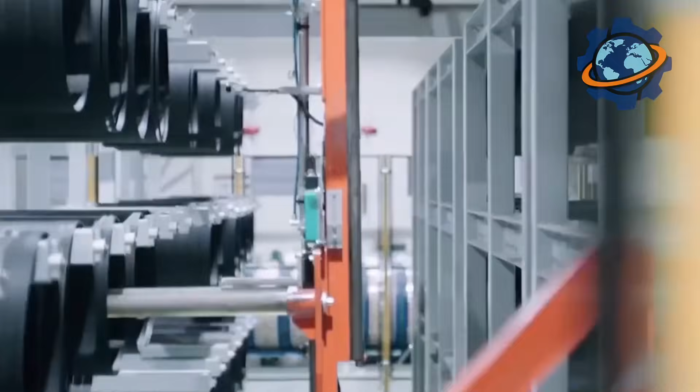Michelin plants in the United States appeared in 1975, when the company opened its first facility in Greenville, South Carolina. Since then, Michelin has become one of the leaders in the tire industry in America, establishing 19 modern production sites in 16 cities. Today, they produce tires for cars, trucks, agricultural machinery, and even aircraft, combining French engineering with American scale. Let's go take a look.

This started long before American drivers knew how to pronounce Michelin without an accent. Long before the internet, before electric cars, before all these smart tires with chips, when cars still hummed and smoked with real gasoline, and a road trip felt like a journey, not a commute to the office. The French brand Michelin, with its smiling rubber man, known here as Bib the Michelin Man, had been dreaming of America since the early 20th century. But this dream took a long time to ripen.

Everything changed in 1973 when the oil shock shook the United States. Drivers started looking for savings, automakers for efficiency, and in this new game, a high-quality radial tire from Europe suddenly became not just a novelty, but a real breakthrough. Michelin, which had invented radial technology back in 1946, understood. The moment had arrived.

Greenville, South Carolina. It was here, among the hills, pine forests, and reddish clay soil, that the first Michelin plant in the US opened in 1975. Not in Detroit, not in Los Angeles, but in Greenville, a quiet city with plenty of land, little noise, and enough working hands. It was a relocation of engineering culture across the ocean. French specialists worked alongside American technicians. Documents were translated from the metric system to inches, gallons, and pounds. And yet, day by day, machine by machine, shop by shop, the plant came to life.

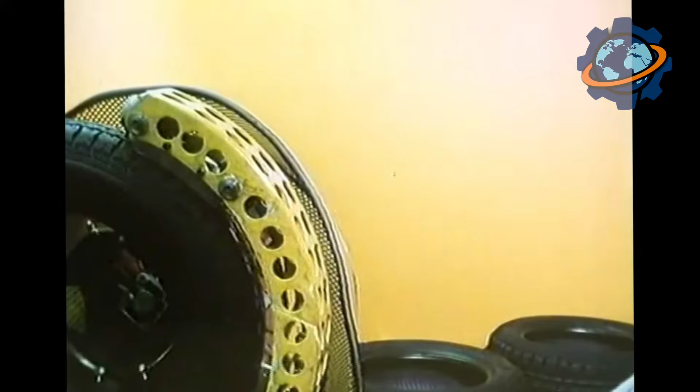Back then, they produced radial tires for passenger cars, and it seemed like some kind of magic. American brands were still mass-producing diagonal models, which were loud, stiff, durable, but not long-lasting. Michelin showed something different. Tires that worked softly, quietly, and for a long time. They seemed to listen to the road.

1977, a second plant. 1981, another one. Then logistics centers, testing grounds, scientific laboratories. Everything was gradual, calm, without advertising. Michelin wasn't clamoring for the front pages. It was just doing its job. Under the wheels of American cars, past farms, cities, canyons, what was rolling was no longer just tires, but a philosophy of the tire, made with understanding and love for the road.

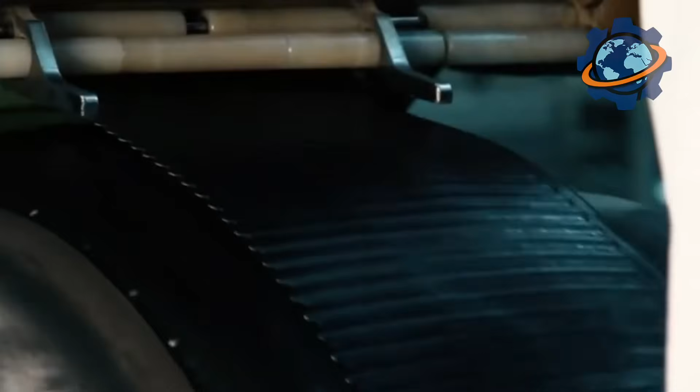Today, that first plant in Greenville is not just operational. It has become a training hub, an R&D center, the heart of Michelin's entire presence in the US, and the company itself is one of the largest employers in South Carolina. And if you stop somewhere on an interstate in Tennessee or Texas, get out of your car and look at the tread, it's quite likely that it was born right there, in the quiet workshops of Greenville, where rubber smells of warmth and the past.

To manufacture tires today, it all begins far across the ocean, in places where the air is dense, humid, and smells of earth, trees, and latex. Natural rubber, one of the main components of tires, grows in the bark of Hevea brasiliensis, mostly in Southeast Asia: Thailand, Indonesia, Malaysia. Michelin has long-term contracts with these countries, as well as its own plantations in Brazil and Africa.

On the plantations, a milky liquid, latex, is collected from the trees. It is poured into barrels, thickened, dried, and pressed into blocks of raw rubber weighing 77 pounds each. Then they are packaged, labeled, and prepared for their journey. These blocks don't fly on airplanes. They sail on container ships across the Pacific Ocean, through the Panama Canal or the Atlantic.

Michelin has its own logistics chains, with transshipment points, warehouses, and quality control systems right at the ports. One of the main American ports for rubber delivery is Charleston, South Carolina. Upon arrival, the rubber blocks are loaded onto trucks or railway platforms. They go directly to the plants, including to Greenville, Anderson, and Lexington, where large Michelin USA centers are located.

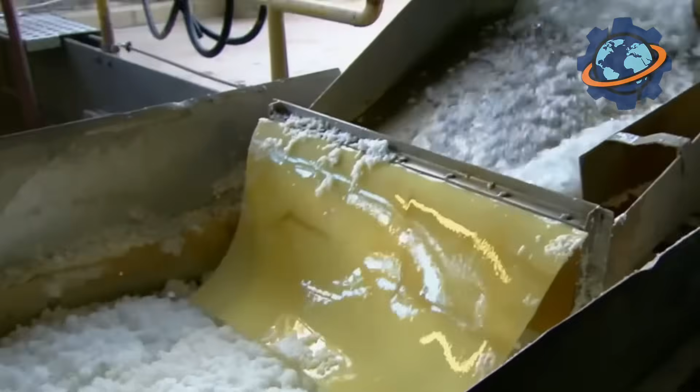In parallel with natural rubber, synthetic rubber is supplied to the plants. It is produced in the US, in Texas, Louisiana, and Ohio. This is a petrochemical product, stable, predictable, with precise properties. And so, when both components, natural and synthetic rubber, are in the workshop, they are inspected. Density, elasticity, moisture content, color, even smell. Because each type of tire requires its own unique composition. This is how the journey of rubber begins, before it becomes part of that very tire that speeds between Charlotte and Miami.

When the blocks of rubber, natural from the tropics and synthetic from US chemical plants, arrive at the Michelin factory, they are still wild. They need to be tamed, combined, and endowed with strength, flexibility, and resistance to heat, rain, cold, and time. For this, there is the alchemy of mixing, the heart of tire production.

At the factory, it's simply called rubber mixing, but in essence, it's an industrial kitchen where, instead of spoons, there are steel mills, and instead of ovens, giant drums with spiral-shaped shafts.

First, an operator, usually an experienced specialist, loads precisely weighed ingredients into the mixer: blocks of rubber, typically 70 to 150 pounds per batch, as well as carbon black, which gives the mixture strength and a rich black color. Silica is added to it, improving the tire's grip on wet roads.

Oils and resins are essential, responsible for elasticity and flexibility, as well as sulfur, which will become a key element of the future vulcanization. All this together creates a recipe, precise to the gram, which depends on the type of tire: passenger, sports, truck, or even aviation. Each requires its own special composition.

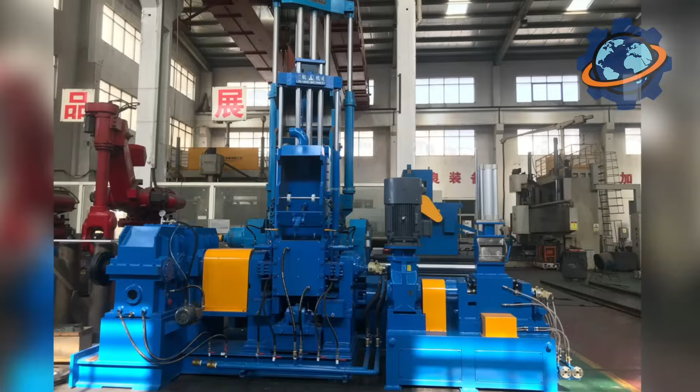Sometimes a mixture can contain up to 200 components, each with a clear function, each tested by time and the laboratory. A Banbury mixer, a giant steel cauldron with rotating blades, heats the mixture to 350 degrees Fahrenheit. The blades rotate with incredible force, 40 revolutions per minute, tearing and kneading the rubber, mixing it with fillers.

Inside, a dull roar is heard, a creak and a smell of hot, living rubber. The mixture becomes black, sticky, dense, thick like molten chocolate. The smell, however, is not at all like chocolate.

When the mixing is complete, the hot mass is discharged in the form of thick black sheets, which are rolled through steel rollers, resulting in rubber sheets up to 0.5 inches thick. These sheets are then cooled, labeled, each type having its own code, and sent to the area for forming the tread, sidewalls, and inner layers of the tire.

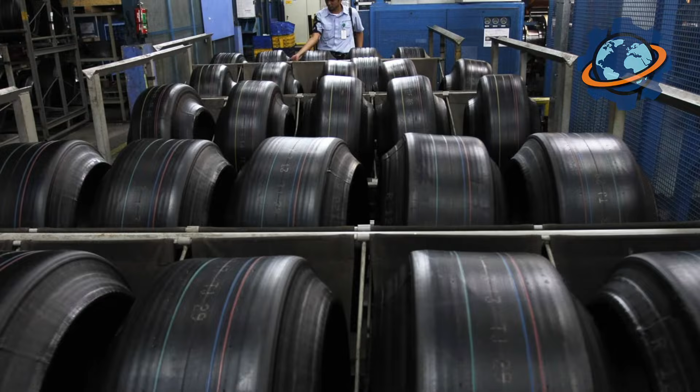After mixing, the rubber is still just black sheets, each with a future, but not yet a form. To become a tire, it needs to be assembled, layer by layer, by hand and machine at the same time. This process is called tire building, and takes place on a special building drum which rotates like a potter's wheel, only under computer control. The inner liner is an airtight, very thin layer that holds air inside the tire.

It is unrolled first, as a base on which the rest will be laid. Without it, the tire would simply breathe and lose pressure. In modern radial tires, this layer is made of synthetic rubber that doesn't let air escape even under a pressure of 50 psi. Next, the carcass.

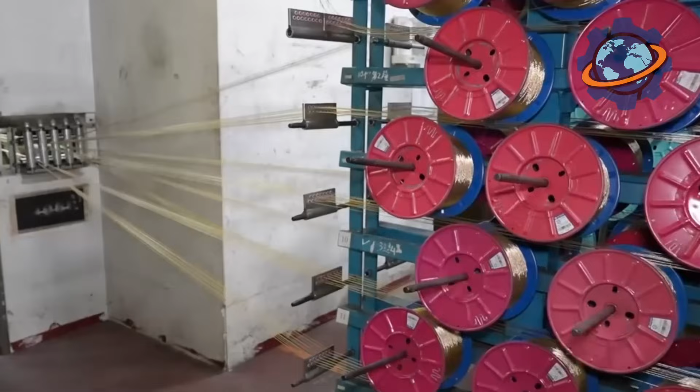Textile or polyester cords are laid on the inner liner, thin but extremely strong threads that run diagonally. They create a frame that holds the tire's shape during rotation. Then, steel reinforcing belts are applied, thick steel wires woven at an angle. They give the tire rigidity, stability at speed, and resistance to punctures.

Thicker layers of rubber on the sides are responsible for flexibility and protection. At the bottom of the tire, beads are formed, with built-in steel rings. These beads will later sit tightly on the wheel rim. They must withstand the weight of the car, from 2,000 to 7,000 pounds, and not slip off even during a sharp turn.

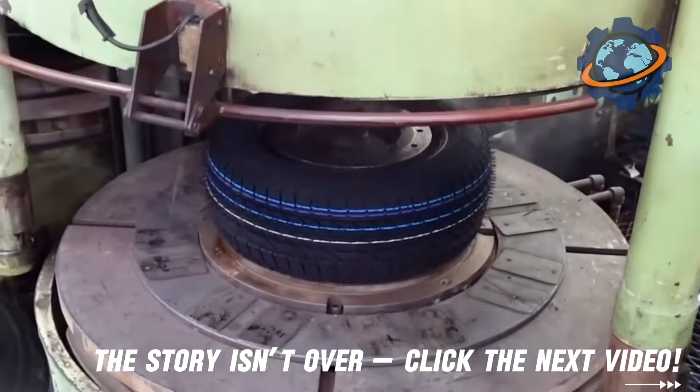Finally, the tread layer is applied on top, a thick strip of rubber compound with a deep pattern. It's not carved out immediately; the pattern will appear later, during vulcanization. The tread is the tire's contact with the road, and almost everything depends on it: grip, braking, wear, noise. Next comes vulcanization and tread stamping, and that's it. The tire is ready to become part of your car.

Every year, over 200 billion glass bottles are produced worldwide. But have you ever wondered where this avalanche of glass began? One factory in the town of Alton was once considered the heart of the industry, so large that its furnaces burned continuously for decades.

There, glass was born that people drank from, breathed in, and even collected. But something went wrong. What stopped the giant that turned the packaging world upside down? And what mysterious face still greets visitors at its closed gates? Watch until the end, and you'll find out what they don't write in company histories.

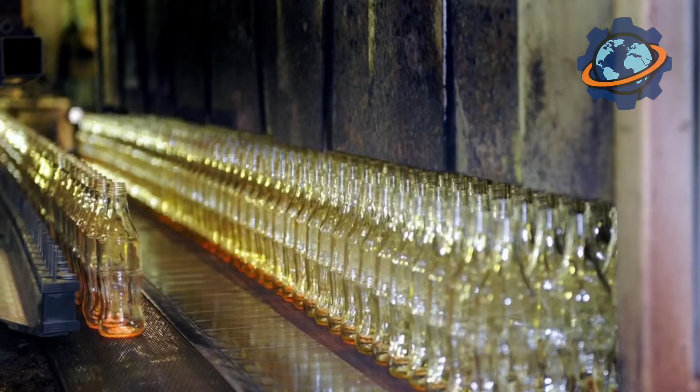In its furnaces, they melted sand, soda ash, limestone, and a bit of mystery. Because from this fire, the universal container of the mass consumption era was born. Beverages, medicines, perfumes, canned goods, everything was bottled in containers made here. Owens, Illinois didn't just meet demand, it shaped it. And it's from this factory that the story begins of how glass became a global commodity, and the furnace, a symbol of progress.

Before Owens, Illinois, there was Alton, a town of river docks, brick factories, and dust from cargo. And there was an insatiable demand for glass.

In the second half of the 19th century, America drank, canned, and medicated, all of which required containers, glass containers, reliable and mass-produced. It was then, in 1873, that the Illinois Glass Company appeared on the banks of the Mississippi River.

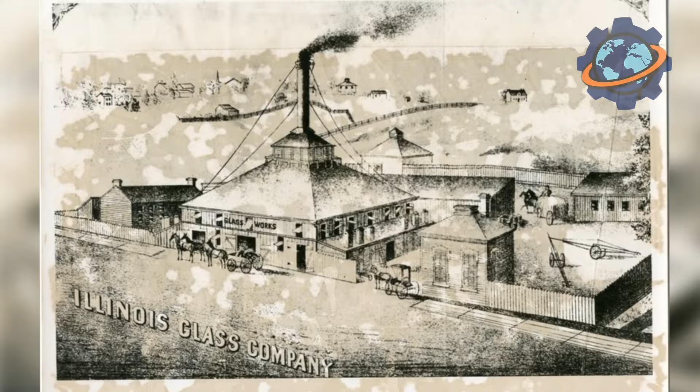But thanks to its proximity to the river, which meant cheap logistics, thanks to the availability of raw materials, since sand and soda ash were nearby, and thanks to an abundance of ideal labor, because Alton was growing as a town of workers, the factory began to grow rapidly. By the early 20th century, Illinois Glass had become one of the leading glass companies in the United States, known for its quality, scale, and the fact that everything was still made by hand here.

And then, in 1903, an innovative engineer named Michael Owens from Toledo, Ohio, invented the world's first fully automated bottle-making machine. It could produce up to 2,400 bottles per hour, compared to the 4 or 5 of a manual craftsman. This was the beginning of a true revolution.

In 1929, two giants, the Illinois Glass Company and the Owens Bottle Company, merged. Thus, the Owens Illinois Glass Company was born. And the Alton factory, one of the key assets of the new corporation, began to work not just for the country, but for an era.

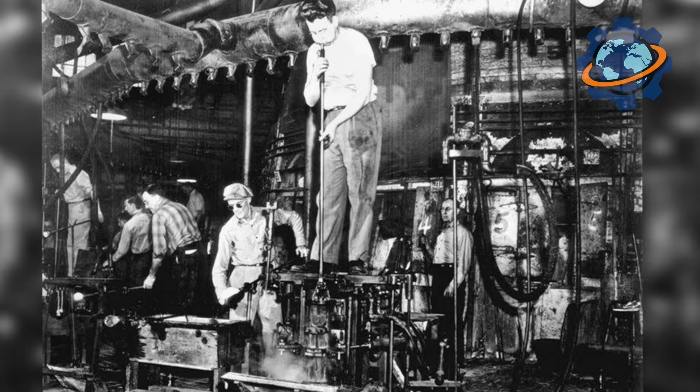This took automation to a new level. The factory in Alton became a testing ground for scaling new technologies. Here, for the first time, continuous bottle production lines were introduced, where glass wasn't made, but cast in a stream, like metal at a steel mill.

Everything was rhythmic, like music. A drop of molten glass fell into a mold, rotated, cooled, was ejected, and then down the line.

They invented the individual section machine, which worked on several molds simultaneously. Each section was independent, easily adjustable, and could produce a different type of bottle. This allowed for running various orders on a single conveyor, a breakthrough in flexibility.

Owens, Illinois was the first to implement a quality control system on the line, defect detectors, automatic rejection of flawed items, standardized necks and thread pitches. They also improved the cooling and annealing of glass, reducing the rejection rate to a record low.

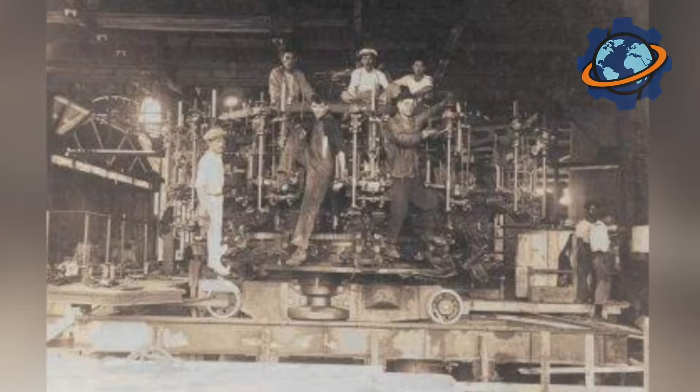Thanks to these innovations, in the 1930s and 60s, the company didn't just dominate, it set the rules of the game. Many technologies that are now considered standard in container manufacturing were born or first implemented in Alton.

Everything great has its end, not always loud, but always palpable. The Owens, Illinois Glass Company in Alton, once the largest bottle glass factory in the world, shut down in 1983. Its furnaces went out not instantly, but for good.

So why did this happen? The reasons weren't a single bullet. It was a slow volley of several factors pressing from different sides.

In the 1960s, glass containers began to lose their monopoly. The growth of cheap and lightweight plastic bottle production was a blow to the bottle industry. Plastic was pushing glass out of the market for beverages, household chemicals, and food products.

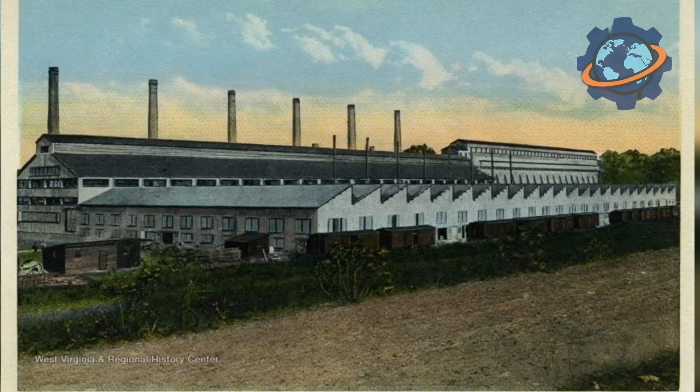Orders became fewer. The Alton factory, established in the 1920s and 30s, was technically perfect for its time, but morally outdated in the new era. Its machines and workshops couldn't compete with newer, more flexible factories in other regions of the United States and the world.

Renovations required millions in investment, and the corporation decided to invest in other locations. Illinois, particularly the city of Alton, experienced a general economic decline in the 1970s and 80s. Other factories were closing, demand for logistics was decreasing, and the labor market became unstable. The city, which once relied on Owens, Illinois, began to falter, and with it, the factory.

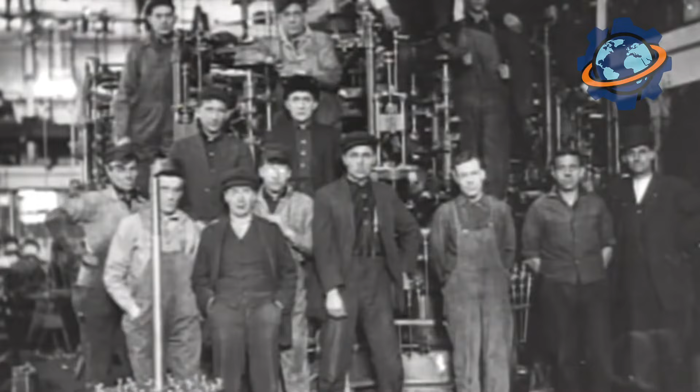In the 1980s, O-I Glass Incorporated began to revise its strategy. It cut old sites, sold or mothballed unprofitable workshops, and centralized production. Alton was on the list of those that were not saved by their history or scale.

In 1983, after more than 100 years of history, the factory gates closed. Some employees moved to other plants, some retired, and some were left without a job. And the workshops that once hummed were covered in dust.

Today, everything happens more precisely, faster and cleaner. The processes are automated and more carefully controlled. Factories work tens of times faster.

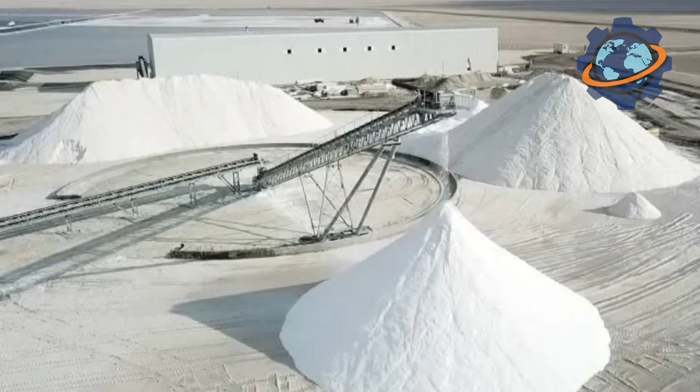Glass begins with a sound, the dull loading of the batch into the melting furnace. In this mixture: finely ground quartz sand, soda ash, limestone, and a pinch of destiny. Everything is ground to a flour, weighed to the gram, because even a microscopic error, and the glass won't sing.

And then, heat. The temperature in the glass tank reaches 3,000 degrees Fahrenheit. Inside, a giant rectangle burns, resembling a sacrificial altar of industry. Flames hiss, air hums, walls glow orange.

The batch begins to change its state. First it sinters, then melts, flowing into something between honey and lava. This state is the most valuable. The molten glass becomes a homogeneous liquid with a viscosity like fresh amber. It flows slowly, with dignity, as if it knows what will be born from it.

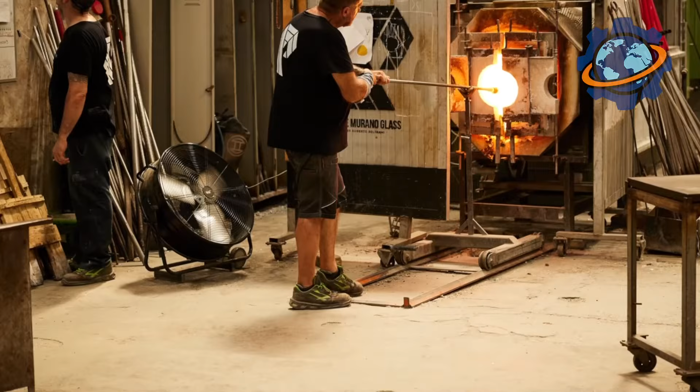All impurities and bubbles are forced out. The temperature is regulated with degree precision. The surface of the glass is mirror-like, quiet.

But underneath, everything is moving. Thin waves of viscous glass roll from left to right, slowly drifting towards the exit channel. From there, the melt drips, like caramel, into a mold.

But not into one, but into hundreds. Modern lines have dozens of sections. Each receives a hot gob. That's what a portion of the melt is called.

It falls freely into the mold and is immediately blown with compressed air. In a moment, the mold bursts with life, giving birth to a bottle, jar, or flask.

The glass cools in stages. The first second is the most important. If it cools too quickly, it will crack. If too slowly, it will deform.

Therefore, the bottle then enters an annealing lehr, a long tunnel where its temperature gradually drops from 900 degrees Fahrenheit to room temperature.

This glass is still breathing. It still has a memory. It will be polished, inspected, packaged, and it will go out into the world, like silence in an ampule, like the fizz of a carbonated drink, like perfume in a bottle.

And it all began with a viscous, almost mystical liquid, flowing between flame and form, like the hot soul of industrial alchemy. By the way, about that famous closed factory, who knows what figure stood near it?

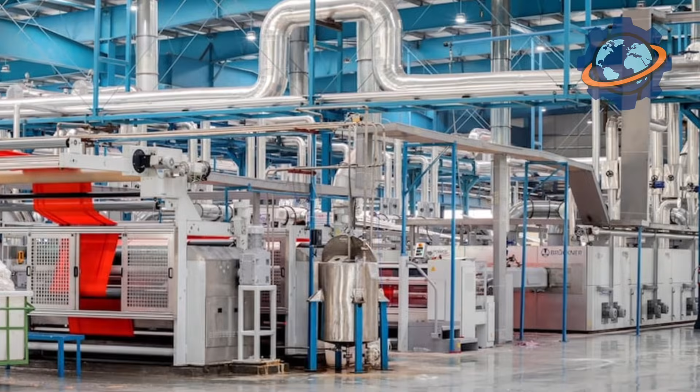The story begins in specialized foundries where clean room standards rival semiconductor fabs. These facilities maintain air purity of less than 100 particles per cubic foot, 10,000 times cleaner than normal atmosphere. Even microscopic dust particles cause catastrophic flaws in turbine blades spinning at speeds where centrifugal forces generate stresses exceeding 70,000 pounds per square inch. That's pressure crushing steel like aluminum foil.

Workers suit up in full-body cleanroom gear before entering casting halls. Inside, massive vacuum furnaces standing 2 stories tall and weighing 80 tons create environments replicating outer space. Vacuum pumps evacuate air until pressure drops to 1/1,000,000th of atmospheric pressure.

At these conditions, materials behave differently. Impurities vaporize instantly. Gases trapped in metal escape, leaving behind purity impossible at normal pressure. Processing single batches costs $50,000 in electricity alone.

Next comes mold preparation, where ceramic shells, think pottery on steroids, get built layer by microscopic layer. Technicians dip wax patterns shaped like turbine blades into ceramic slurry 10 times, waiting hours between coats. Each layer adds thickness thinner than human hair.

After 20 days of coating and drying, workers melt wax away in autoclaves, leaving hollow ceramic molds with internal channels more complex than human circulatory systems.

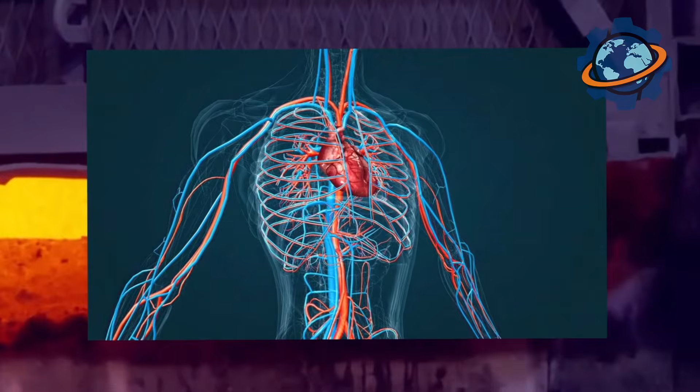These molds contain passages narrower than spaghetti strands, designed to cool blades from inside during operation. Some channels measure just 0.008 of an inch across, thinner than credit cards. Manufacturing these passages requires such precision that lasers verify every dimension.

One blocked cooling hole means blade failure at 300 degrees lower temperature. That's the difference between safe flight and catastrophic engine disintegration at cruise altitude, scattering turbine fragments through the fuselage like shrapnel.

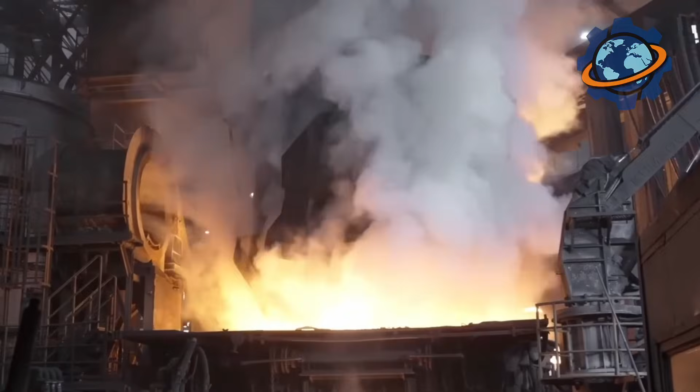Giant crucibles containing nickel-based superalloy. Mixtures of nickel, chromium, cobalt, aluminum, titanium, plus 6 other elements in exact proportions. Heat to 2,700 degrees Fahrenheit. Picture liquid metal glowing white like miniature stars captured in ceramic containers.

This superalloy, developed through decades of research, contains more expensive elements per pound than fine jewelry. A single turbine blade uses materials costing $800 before any manufacturing begins. Robotic arms lower ceramic molds into this molten inferno with precision measured in thousandths of inches.

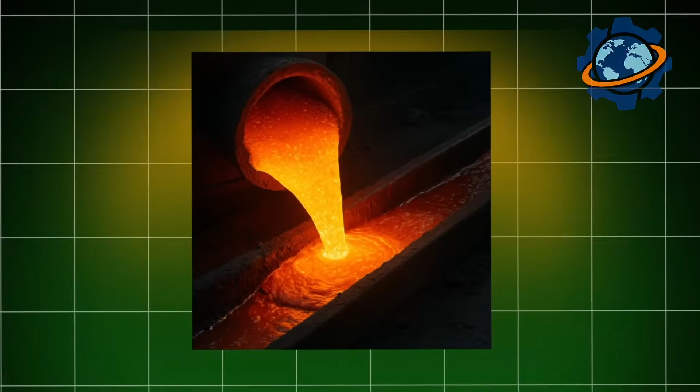Timing matters critically here. Pour too fast, turbulence creates defects. Too slow, metal solidifies prematurely. Furnaces tilt at exactly 2 degrees per second, filling mold cavities in 17 seconds. During this pour, metal temperature drops 300 degrees, requiring computer-controlled heating to maintain consistency. One temperature fluctuation of 5 degrees ruins the casting, wasting months of preparation.

Now comes the magic, directional solidification. The filled mold sits atop a water-cooled chill plate at 70 degrees Fahrenheit while surrounded by heating elements maintaining 2,400 degrees above. This creates the steepest temperature gradient in metallurgy, over 2,000 degrees difference across 6 inches. That's transitioning from Arctic to volcanic conditions in the space between your thumb and pinky.

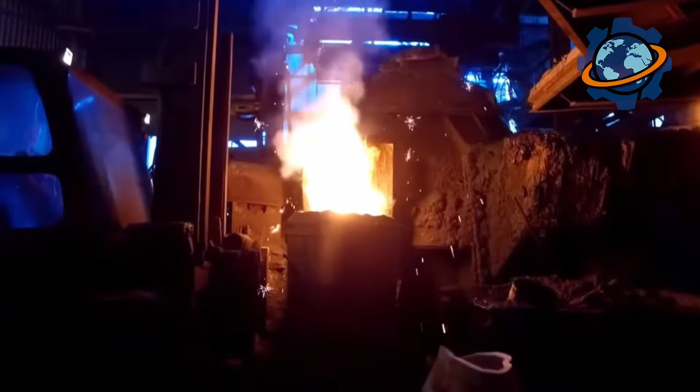Slowly, incredibly slowly, a computer-controlled mechanism lowers the mold through the furnace at speeds of 6 inches per hour. Picture watching paint dry, then slowing that down tenfold. As the mold descends, metal solidifies from bottom upward in a razor-thin freezing front. This directional cooling forces crystal growth in one direction only, upward, eliminating horizontal grain boundaries where cracks normally form.

The process takes 14 hours for a 4-inch blade. Rush it by even 10% and polycrystalline grains form, destroying blade strength. But here's where physics becomes art. At the mold bottom sits a grain selector, a corkscrew-shaped passage so narrow only one crystal nucleus fits through.

As metal solidifies upward, countless tiny crystals form at the chill plate. They compete, growing upward like metallic trees racing toward sunlight. Most hit the spiral walls and stop. Only the perfectly aligned crystal, the one matching the spiral's orientation, passes through this metallurgical gauntlet.

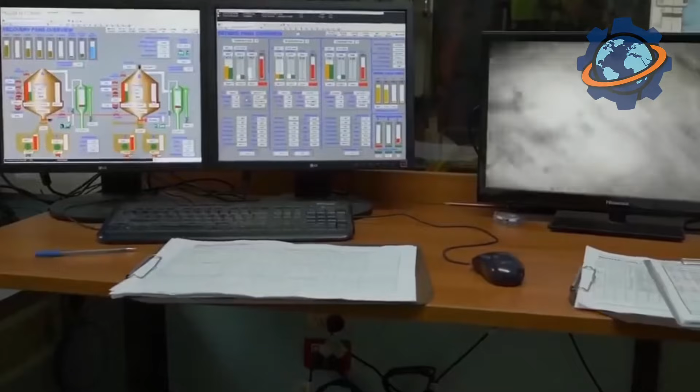This step is critical because it ensures the entire blade, every atom from root to tip, belongs to one continuous crystal lattice. No grain boundaries exist anywhere. Normal metals contain millions of grain boundaries per cubic inch. Single crystal blades contain 0. Without boundaries, there are no weak spots where atoms slip past each other under stress. The crystal structure extends uninterrupted through the entire blade like a 3-dimensional molecular Kevlar vest, with atoms locked in perfect geometric formation.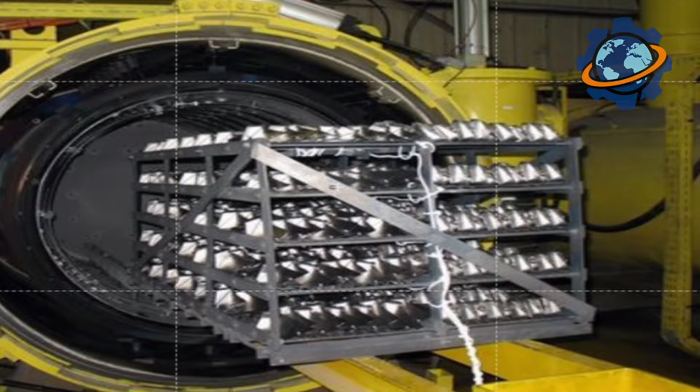After solidification, blades undergo solution heat treatment at 2,200 degrees Fahrenheit for 2 hours, then quench in inert gas. This locks crystal structure permanently and precipitates microscopic strengthening phases throughout the lattice. Next comes aging heat treatment, multiple cycles at precisely controlled temperatures that cause nanoscale particles to form. These particles, called gamma-prime precipitates, occupy 70% of the alloy's volume.

Picture this. Imagine a 3-dimensional checkerboard where hard particles pin the crystal lattice, preventing atoms from sliding. These precipitates remain stable at temperatures where other metals liquefy. They're the secret allowing nickel alloys to maintain strength at 3,000 degrees, temperatures where aluminum vaporizes, titanium melts, and even steel becomes taffy. The heat treatment process takes 96 hours of precise temperature control. Deviate by 15 degrees at any point and mechanical properties drop 40%.

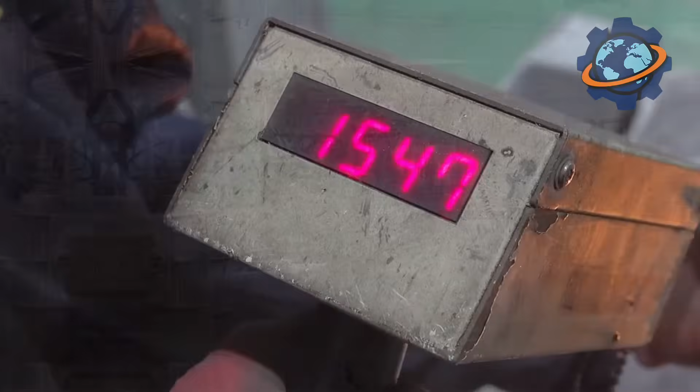Coating application transforms already sophisticated blades into thermal protection systems. First, a metallic bond coat, aluminum-rich alloy, gets applied via high-velocity plasma spray at 20,000 degrees Fahrenheit. Metal particles accelerate to twice the speed of sound, impacting the blade surface with such force they cold weld instantly. This creates a rough surface for subsequent layers while providing oxidation resistance.

Then comes the thermal barrier coating, yttria-stabilized zirconia ceramic applied atom layer by atom layer using electron beam physical vapor deposition. In vacuum chambers, electron beams vaporize ceramic ingots. The vapor condenses on rotating blades, building up a coating 0.08 of an inch thick with a columnar microstructure full of microscopic pores. These pores act like thermal insulation, trapping air pockets that reduce heat transfer. The ceramic coating lowers blade temperature by 400 degrees, the difference between survival and meltdown. Modern engines couldn't exist without this coating technology.

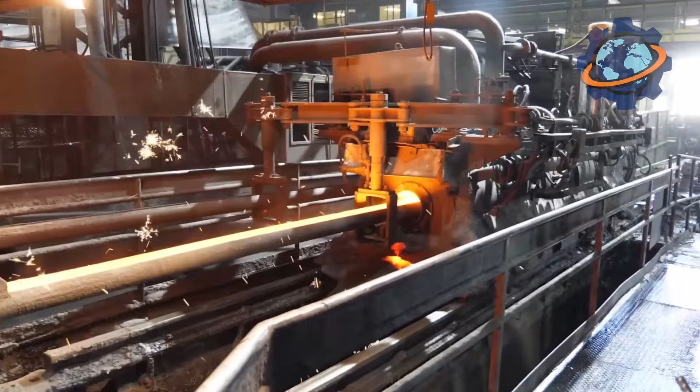This wasn't always possible. Back in 1940, early jet engines used cast iron turbine blades lasting 20 hours before failure. Temperatures barely reached 1,400 degrees Fahrenheit. The breakthrough came when Pratt & Whitney researcher Frank VerSnyder invented directional solidification in 1966, eliminating transverse grain boundaries and doubling blade life overnight.

The true revolution arrived in 1982 when General Electric and Pratt & Whitney independently perfected single crystal casting. Turbine inlet temperatures jumped from 2,000 degrees to 3,000 degrees Fahrenheit, a 50% increase enabling massive efficiency gains. Modern turbofan engines achieve fuel efficiency triple that of 1960s designs. Today, advanced engines like the GE9X powering Boeing 777X aircraft operate at 3,200 degrees, with pressure ratios reaching 60-to-1. These engineering advances cut aviation fuel consumption by 65% per passenger mile over 50 years.

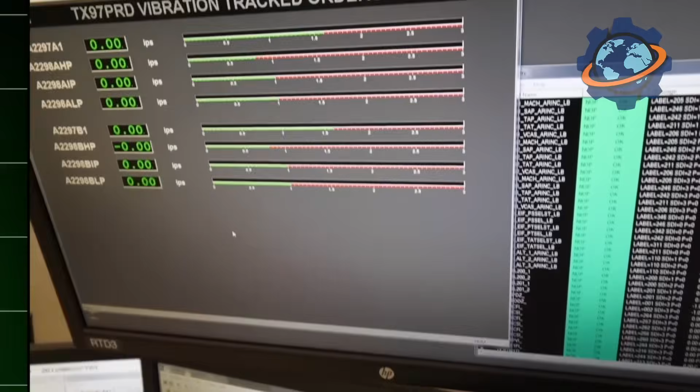Carbon emissions dropped by 12% when replacing older turbine blades with modern single-crystal versions in existing engines, equivalent to removing 18 million cars annually from global fleets. Airlines save over $47 billion yearly through improved fuel efficiency. Maintenance costs drop 58% because single crystal blades last 3 times longer than conventional ones.

So here's the secret promised. These blades don't actually survive above their melting point through material strength alone. They're actively cooled by air bled from the compressor, flowing through those microscopic internal channels at supersonic speeds. This cooling air, already compressed to 400 degrees Fahrenheit, seems hot by human standards but runs ice cold compared to the 3,000-degree combustion gases outside.

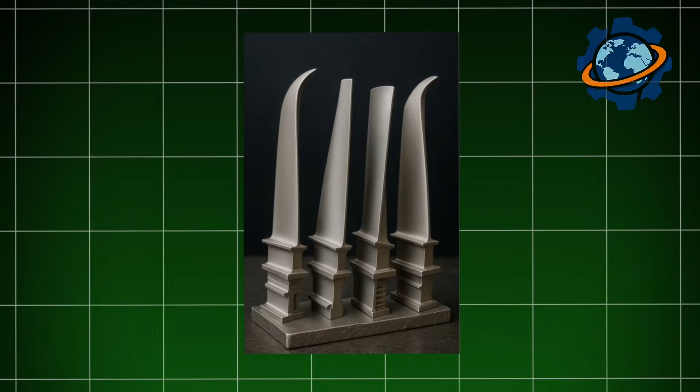Combined with ceramic coatings reflecting heat like mirrors, the actual metal temperature stays below 2,000 degrees, hot enough to glow orange but survivable. From molten metal to flying miracles, the cycle completes. Single crystal turbine blades represent humanity's most sophisticated metal casting achievement. Objects where every atom's position matters, where crystal orientation determines survival, where manufacturing tolerances make computer chips look crude.

We've engineered metal to survive in conditions nature never intended, creating materials that work at their physical limits. That's not just manufacturing, that's molecular architecture enabling the modern world's ability to shrink distance itself.

Every year, humanity extracts over 2 billion tons of iron ore from Earth's crust. Picture this. More than half of our planet's entire weight is iron, most locked in the core, creating the magnetic field protecting all life. But here's what shocks engineers worldwide. We're standing on the most abundant metal in the universe, yet accessing it requires temperatures hotter than volcanic lava. How does rust-colored rock transform into gleaming steel skyscrapers? How do ancient mountains become modern civilization?

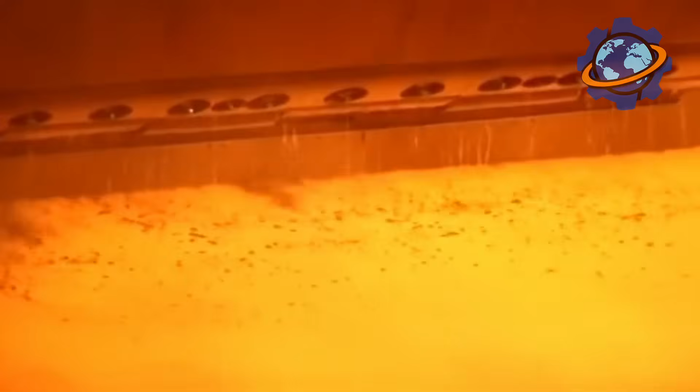Stick around till the end. You'll discover why iron shaped human history more than gold ever did, and the jaw-dropping secret hiding inside every bridge, car, and building around you right now.

The story begins in Western Australia's Pilbara region, where iron mountains stretch across landscapes older than dinosaurs. Massive excavators, standing 8 stories tall, picture buildings that walk, tear into rust-red cliffs with bucket teeth weighing 12 tons each. These mechanical giants rip through rock layers formed 3 billion years ago when Earth's oceans first rusted.

With thunderous crashes echoing across 40-mile-wide craters, each excavator loads haul trucks carrying 400 tons per trip. That's the weight of 80 elephants moving at 40 miles per hour on tires taller than basketball hoops. Processing 30 million tons annually from single mines, enough iron ore to build 12 Golden Gate bridges every single day.

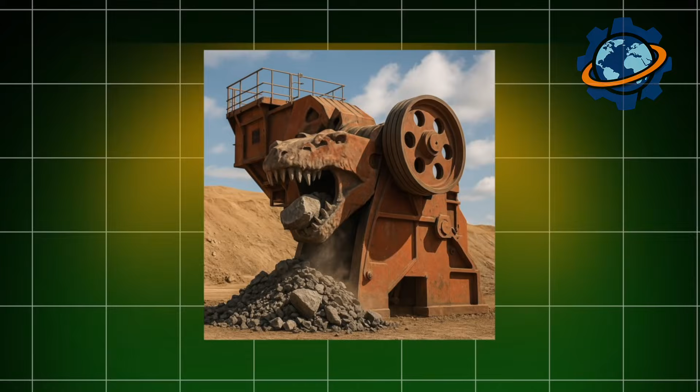Next comes crushing, where house-sized jaw crushers, imagine dinosaur mouths made of hardened steel, pulverize boulders into gravel-sized chunks. With deafening roars splitting eardrums even through protection, these crushers generate forces exceeding 20,000 pounds per square inch. Clouds of red dust billowing upward create artificial sunsets visible from space satellites.

Conveyor belts stretching 12 miles long, longer than Manhattan, transport crushed ore at 18 miles per hour. Workers riding inspection carts traverse distances requiring 25 minutes one way. That's enough belt to wrap around 300 football fields. Every hour, 50,000 tons flow through this system, weight equivalent to 5 Eiffel Towers moving continuously past checkpoints.

Giant grinding mills, standing 5 stories tall, with diameters matching Olympic swimming pool widths, pulverize rock into fine powder. Inside these rotating drums, 20-ton steel balls, each weighing more than shipping containers, tumble with ore, creating grinding thunder heard miles away. Operators monitor vibrations. Wrong frequencies mean catastrophic bearing failures, costing millions.

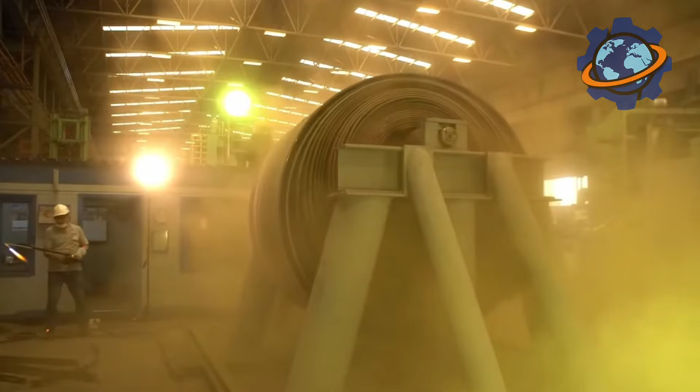At rotation speeds creating gravitational forces triple normal Earth gravity, particles shrink to powder finer than talcum. Processing 8,000 tons hourly, that's filling semi-truck after semi-truck every 30 seconds. This powder, called concentrate, contains 65% iron. Magnetic separators then extract iron particles using forces strong enough to levitate railroad spikes, leaving waste rock behind.

Next comes the blast furnace, a towering inferno standing 30 stories high, its steel shell glowing dull orange even from outside. At internal temperatures exceeding 3,000 degrees Fahrenheit, hot enough to vaporize aluminum instantly, iron ore transforms into liquid metal. Picture Dante's Inferno engineered with precision.

Measured charges of iron ore, coke, and limestone descend from the top, while superheated air blasts upward at 2,000 degrees from ring-shaped nozzles called tuyeres. This creates a raging chemical storm, where carbon monoxide rips oxygen from iron oxide molecules. The reaction releases enough heat to melt granite. Every 3 minutes, sensors check 20 different parameters. Without precision, furnaces explode with force demolishing city blocks.

The blast furnace operates continuously for 15 years, never cooling, never stopping, like Earth's core relocated to industrial facilities. Inside this chemical reactor, materials descend through distinct zones. Upper regions preheat incoming ore. Middle zones drive off moisture and carbon dioxide. Lower depths become hell itself, where iron liquefies.

At the hearth bottom, molten iron collects at 2,800 degrees Fahrenheit. Dense as lead, but flowing like water. Every 4 hours, workers drill through clay-plugged tap holes. Liquid iron erupts in blinding white rivers, flowing through ceramic channels into railroad cars holding 300 tons each.

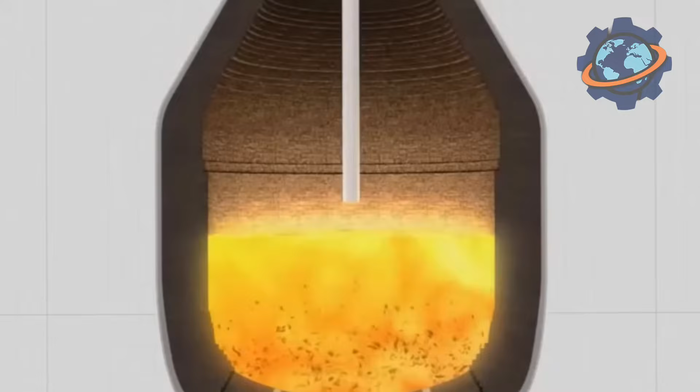This step is critical because timing determines metal purity. Tap too early, slag contaminates. Too late, furnace pressure ruptures containment walls. After tapping, slag, lighter impurities floating atop molten iron, gets diverted into separate channels. This glowing amber liquid, essentially liquefied rock, contains calcium, silicon, and aluminum oxides stripped from ore. Rather than waste, it becomes roadbed material and cement ingredient recycled at 98% rates globally.

The molten iron, called pig iron, contains 4% carbon, too brittle for construction. Picture glass that looks metallic. Drop pig iron from waist height, it shatters into fragments. Next comes the basic oxygen furnace, where pure oxygen blasted at supersonic speeds through 3-foot diameter lances burns away excess carbon in 17 minutes. Flames shooting 70 feet high, temperatures hitting 3,200 degrees, create hurricane-force winds inside steel vessels holding 350 tons of liquid metal.

Steel making requires precision rivaling brain surgery. Computer-controlled oxygen flow adjusts by milliseconds. Operators add exact amounts of manganese, silicon, chromium, elements changing steel properties dramatically. Too much carbon, steel cracks in winter cold. Too little, metal bends under load.

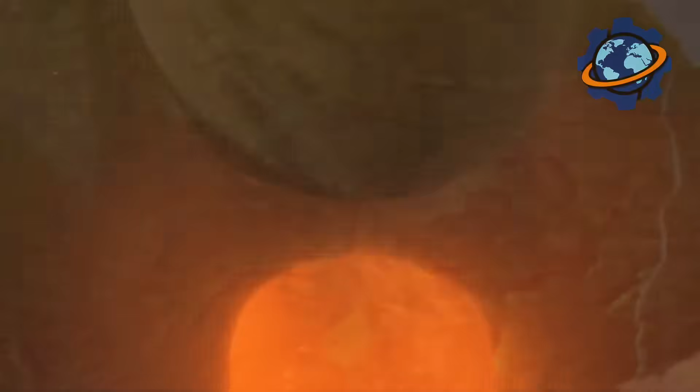Picture this: alloying elements get injected via submerged lances. Electromagnetic stirring, invisible but powerful, homogenizes composition. Samples extracted every 3 minutes get analyzed via spectrometers, determining chemistry within seconds. Modern furnaces achieve carbon content accuracy to 0.01%, the difference between a skyscraper standing or collapsing. After refining, liquid steel flows into continuous casting machines producing slabs 30 feet long, weighing 25 tons, at rates of 1 slab every 90 seconds.

This wasn't always so advanced. Back in ancient Anatolia around 1300 BC, Hittite metallurgists discovered heating iron ore with charcoal produced workable metal. That breakthrough, accidental furnace conditions reaching iron's melting point, changed human civilization forever. Iron tools outperformed bronze, enabling an agriculture revolution.

The breakthrough came when British inventor Henry Bessemer patented his converter in 1856, slashing steel production time from 24 hours to 17 minutes. Suddenly, steel costs dropped 90%. This single invention built modern cities. Skyscrapers, bridges, railroads exploded across continents. Today, global steel production exceeds 1.9 billion tons annually. That's enough to build 75,000 Eiffel Towers yearly, or manufacture 43 million automobiles, or construct bridges connecting every coastline on Earth.

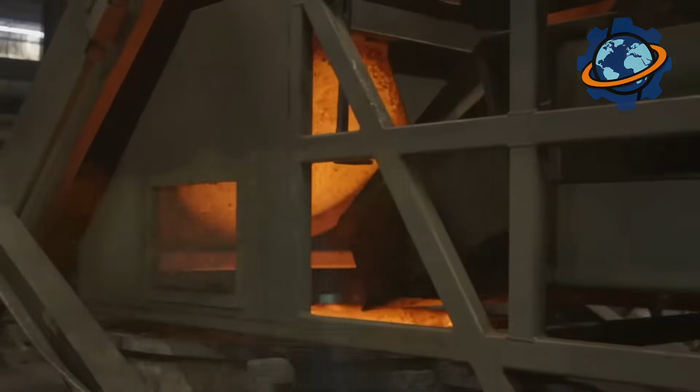Carbon emissions drop by 62% when using recycled steel versus virgin ore, equivalent to removing 12 million cars annually. Industry saves over $80 billion yearly through scrap recycling. Processing costs drop 43% because melting scrap requires 1/3 the energy of blast furnaces. So here's the secret promised. Every ton of steel you see, bridges, buildings, cars, will be recycled indefinitely. Unlike plastic decomposing into microparticles or paper pulping into mush, steel never degrades.

Magnetic separation extracts it perfectly from demolished structures. That girder in your office building might contain steel from 1930s locomotives. Your car's frame could include battleship armor from World War II. Nothing disappears. Metal merely transforms, reborn eternally. From ancient mountains to modern marvels, the cycle completes. Iron, humanity's most essential metal, circulates through civilization like blood through veins. We're not consuming Earth's iron, we're borrowing it, briefly, before passing it forward to futures we'll never see.

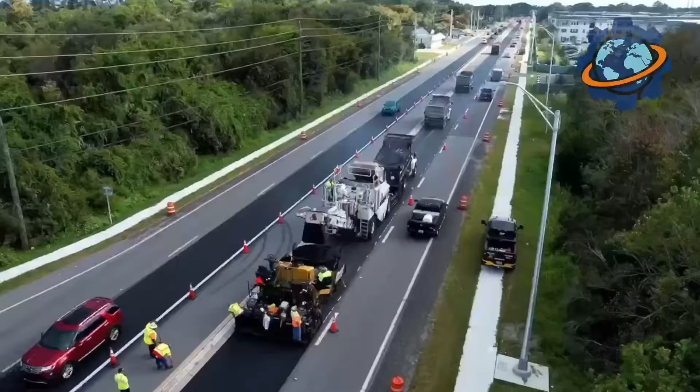Every year, the world lays down over 1 billion tons of asphalt, the material that modern civilization would literally grind to a halt without. But few people know that every foot of road is the result of a complex alchemy of stone, fire, and oil. It all starts with an explosion in a quarry and ends with a hot, black mass steaming under the wheels of a roller. In this video, you'll see how asphalt is born, from blasting rock to the final roller that polishes a new road. And if you stick around to the end, you'll learn a secret that most drivers don't even know exists.

Almost nothing goes to waste. That crushed old asphalt is then added to the new mix back at the plant. On average, new asphalt laid on our roads contains about 22% recycled material. The payoff here is huge, both economically and for the environment. First, it drastically cuts down on the need to quarry new stone and produce new bitumen, which saves natural resources and energy. Second, it makes the final product cheaper, saving billions of dollars from road maintenance budgets.

So, every car trip you take is a journey on a complex piece of engineering that not only withstands massive loads, but is also a prime example of an industrial ecosystem where the old is constantly reborn into the new, closing the loop and making the country's infrastructure a little more sustainable.

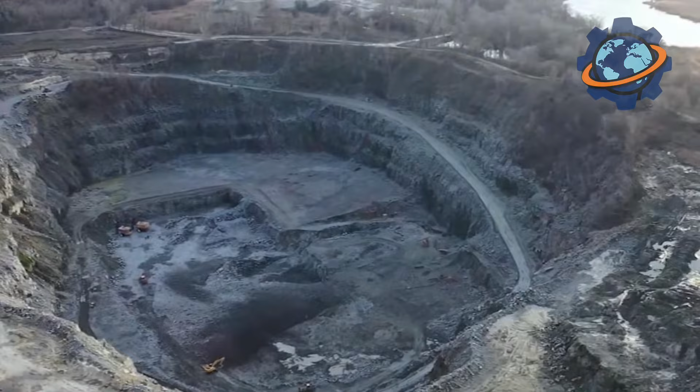The story of asphalt doesn't start on the road. It starts in two completely different places. The first is a quarry. It's a massive wound on the face of the earth where rock is blasted out. It all begins with a loud explosion that shakes the ground for miles. Huge boulders break away from the rock face.

Then, giant haul trucks with wheels taller than a person move in and haul these stone boulders to the primary crusher. This is a metal monster that crushes massive boulders into smaller chunks with its steel jaws and incredible force. But that's just the beginning. The stone then goes through a whole series of crushers and screens, giant vibrating sieves. The goal isn't just to crush the rock, but to carefully sort it by size.

The result is entire mountains of clean, sorted stone, which we call aggregate. You've got everything here, from large, fist-sized rocks to fine crumbs and even dust, like sand. Each size is stored in its own separate pile. It's like in your kitchen, where you have flour, sugar, and salt, each ingredient separate, waiting for its turn. This is the skeleton of the future asphalt, making up 95% of its mass.

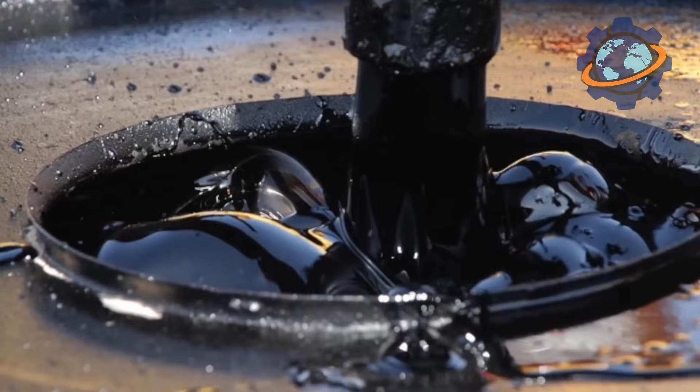The second place where asphalt is born is an oil refinery. When crude oil is processed into gasoline, diesel, jet fuel, and other light products, a thick, black, viscous substance is left at the very bottom of the distillation tower. This is bitumen. In its normal state, at room temperature, it's as hard as a rock. You can shatter it with a hammer. But if you heat it up, it becomes a liquid, like thick syrup.

It's this property, being solid when cold and liquid when hot, that makes it the perfect glue for our stone skeleton. Bitumen is the soul of asphalt. It's the black heart that holds everything together.

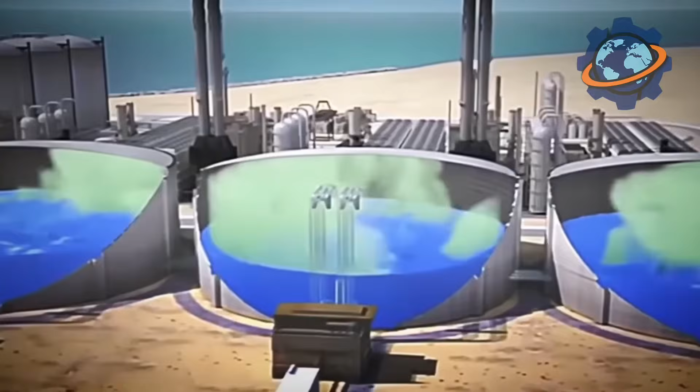Now, let's head over to the asphalt plant. This is where all the ingredients come together. From a distance, it looks like a complex tangled metal jungle. Tall silos, endless conveyor belts, pipes, tanks, and a central tower with smoke rising from it. It's a real factory that works like a single, well-oiled machine.

Different sizes of aggregate are fed from separate bins onto a conveyor belt. But not just randomly. The whole process is controlled by a computer. An operator in a control booth inputs the exact recipe for the asphalt. Depending on where it's going to be used, a busy highway or a quiet side street, the recipe will be different. The computer knows exactly what percentage of large stone, medium, small, and dust is needed for the perfect mix. It's like baking a complex cake, where every gram counts.

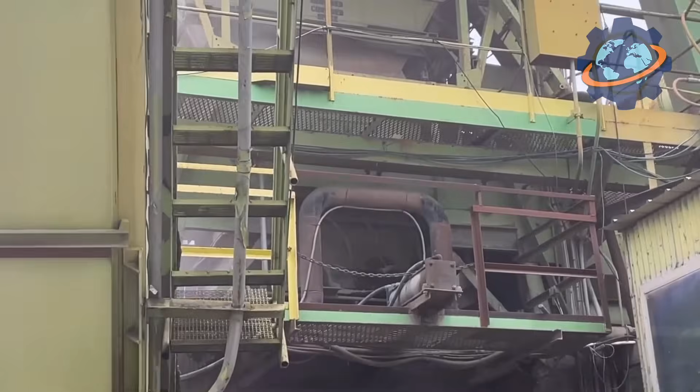This mix of stones begins its journey up a long, inclined conveyor and enters the heart of the plant, the drying drum. This is a huge, long tube that slowly rotates, set at a slight angle. From one end, a powerful burner blasts a roaring pillar of fire inside, like a jet engine. The temperature inside hits 300 degrees Fahrenheit. The stone, slowly tumbling inside this drum, heats up, and most importantly, gets completely dried out.

Moisture is the #1 enemy of good asphalt. Even a single drop of water can prevent the bitumen from sticking properly to the stone surface. So, the stone has to be bone dry. After the drying drum, the hot, moisture-free stone is carried up by an elevator to the very top of the central tower.

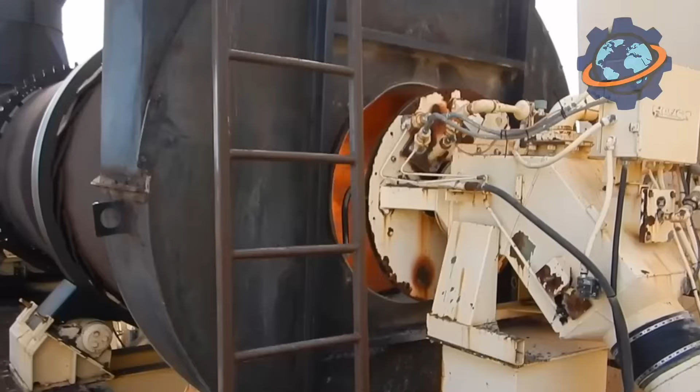There, it passes through another set of screens for a final quality check on the sorting, and then falls into hot storage bins. Meanwhile, in special insulated tanks, our black glue, the bitumen, is being heated up. It's also brought to a high temperature to make it fluid and runny. And now comes the climax. The computer gives another command.

A weigh hopper, with incredible accuracy, measures out the required amount of hot stone of each size from the different bins. Then, a precisely measured amount of hot liquid bitumen is sprayed into this superheated stone mix. This entire mass, stone and bitumen, is dropped into a mixing chamber called a pug mill. It's like a giant kitchen mixer, but instead of whisks, it has two powerful shafts with metal paddles.

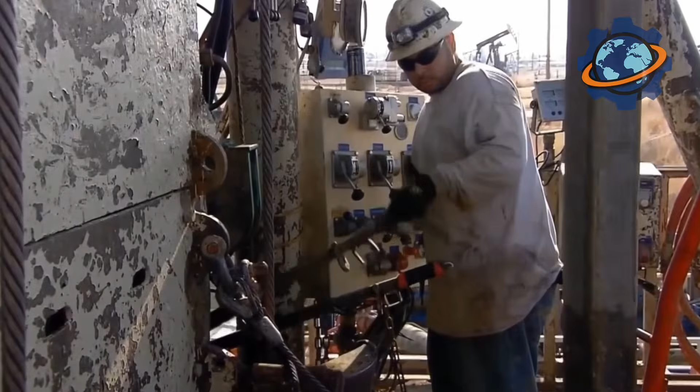These paddles churn the hot mass with enormous force, and in less than a minute, every single stone, every grain of sand, is coated in a thin, shiny film of black bitumen. Out of the chamber comes the finished asphalt, a uniform, steaming black mass with a characteristic oily smell.

Now this hot, freshly made product needs to be stored until it's shipped out. It's lifted and dumped into special insulated storage silos. They're like giant thermoses that can keep the asphalt hot for many hours, sometimes even days. Dump trucks pull up under these silos. With a loud clang, a gate opens and several tons of hot asphalt pour into the truck's bed with a roar and a cloud of steam.

The bed is always covered with a tarp to keep that precious heat in during transport to the paving site. At the construction site, the final act begins. The dump truck slowly unloads the hot mix into the hopper of a special machine, an asphalt paver.

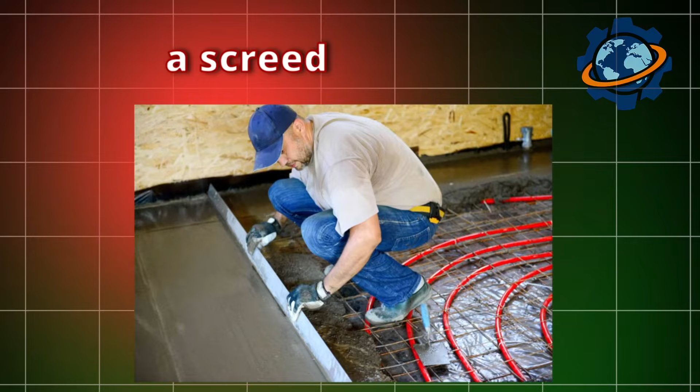This machine, moving forward slowly, evenly spreads the asphalt over the road surface, forming a perfectly level layer of a specific thickness. At the back of the paver is a heavy, heated plate called a screed. It does the initial compaction and gives the surface its first pass of smoothness, but the asphalt is still soft and loose. To make it strong, it needs to be compacted.

Right behind the paver follows a whole team of heavy road rollers. First come the large steel drum rollers, which use their immense pressure to squeeze the air out of the asphalt mix and force the stones to lock together tightly. Then, pneumatic tire rollers might be used, which knead the surface, making it even denser. And in the final stage, smooth steel drum rollers pass over it again to give the road its final, smooth finish.

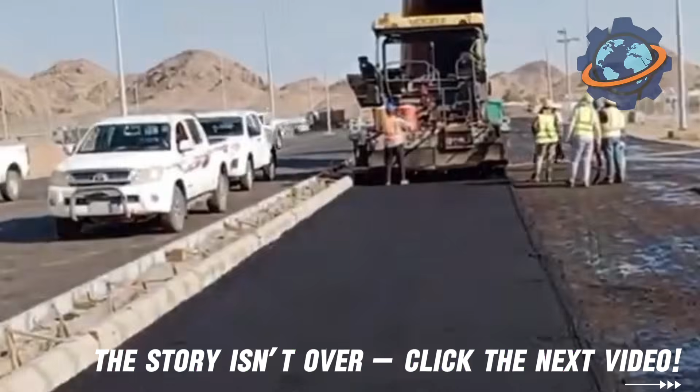As the asphalt cools, the bitumen turns from a liquid back into a solid. It permanently glues all the stones together, turning the loose mix into a strong, waterproof monolith. After a few hours, the road that was recently hot and soft becomes hard and ready for traffic. And that's the whole point. From the explosion in the quarry to the heavy roller on the road, every stage of this process is designed to create a durable, reliable surface that will withstand thousands of cars every single day.

Every year, over 100,000 kilometers of new rails are laid across the planet. And every single one of them goes through hell first. Fire over 1,500 degrees, the crushing force of rollers, and jets of water that cut metal like glass. From scrap heap to gleaming steel, a rail's journey is like an initiation, where every step decides whether it survives or shatters under the first train. But what makes this steel so perfect that it can handle thousands of tons of pressure every day without bending or cracking? Stick around, and you'll see how the arteries that move the entire world are born.

First, you gotta make the steel. A mix of scrap metal, iron ore, coke, and limestone gets dumped into the furnace, the raw ingredients for a future rail. The temperature in the blast furnace hits over 2,700 degrees Fahrenheit. That's 1,500 Celsius. Under that hellish heat, the metal turns liquid, glowing like the sun. Workers keep a close eye on the composition. Even an extra 0.1% of carbon can make the rail too brittle or too soft.

After melting, the molten steel is poured into molds, metal forms that create rectangular blocks called ingots or slabs. They don't look like a rail yet, just solid bars a few meters long and over a foot wide. After pouring, each blank is cooled, but not completely. It's kept warm to reduce stress during the rolling process.

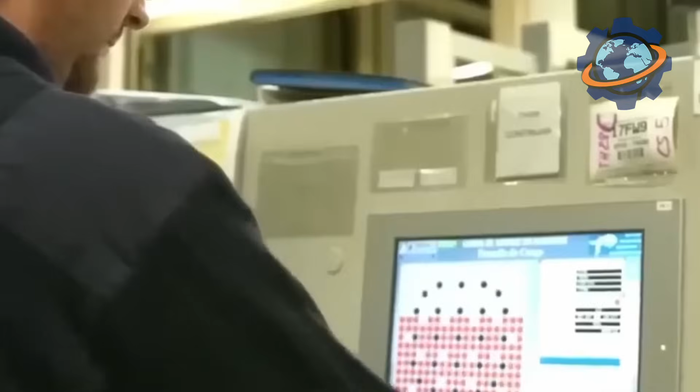This stage is the foundation for everything. If the steel comes out bad, even a perfect rolling job won't save it. So quality control here is almost a ritual. Chemists check the composition, metallurgists monitor the temperature, and automatic sensors track the cooling uniformity. Only when every single parameter is locked in does the blank move on into the fiery heart of the rolling mill.

In the rolling mill, massive billets, up to 20 meters long, are heated in furnaces to over 2,200 degrees Fahrenheit, 1,200 Celsius. The metal becomes pliable, like dough, but keeps its density and strength. The hot blank is immediately fed into reversing rolling stands. These are huge machines with heavy rollers. It passes through them several times, first to reduce its thickness, then to give it the right shape.

Each pass is a squeeze and stretch, gradually transforming the metal from a simple billet into a future rail with its complex profile: the head, the web, and the foot. To get the exact geometry, they use a final sizing roll. It's like the final polish of the shape, with tolerances on this step not exceeding 0.3 of a millimeter.

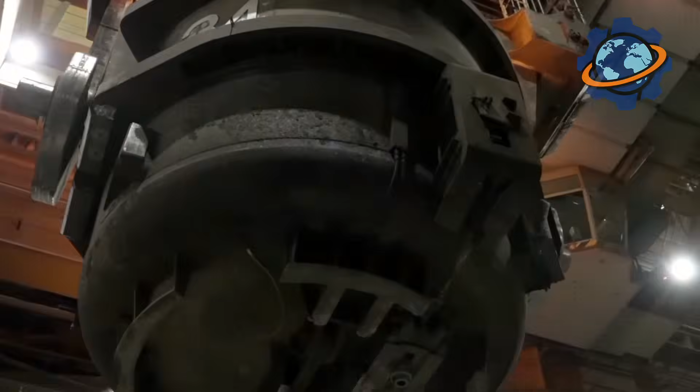Right after rolling, while the rails are still hot, they go through a cooling process. They're either evenly blasted with air or left to cool on an open rack. It's crucial that the cooling is symmetrical, otherwise the metal could warp. To ensure a smooth, bump-free ride at high speed, individual rails are welded into long sections, up to 400 meters without a single joint. The main method is thermite welding.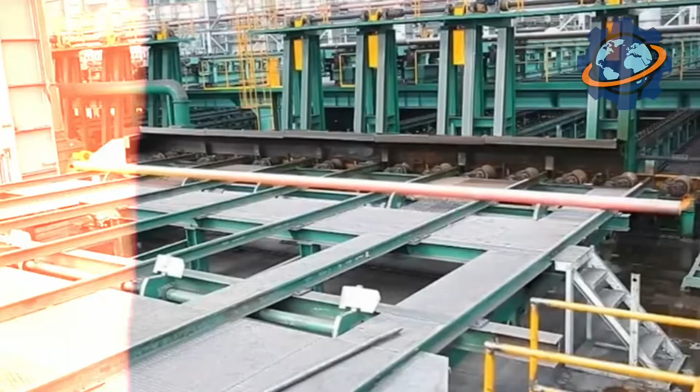In a special mold between two rails, a gap of a few millimeters is left. A molten steel mixture, created by the reaction of powdered aluminum with iron oxide, is poured in. The temperature hits a scorching 4,500 degrees Fahrenheit, 2,500 Celsius. This molten metal flows into both parts of the rail and fills the joint area. When it solidifies, it creates a monolithic bond, stronger than the rail itself.

After that, the excess metal is trimmed off, and the weld is ground down to a perfectly smooth level, without a single bump. Every joint is inspected with ultrasound or eddy currents, to make sure there are no hidden micro cracks. These long rails are easier to transport than you'd think. They're either wound onto special drums or carried on platforms with pivoting supports.

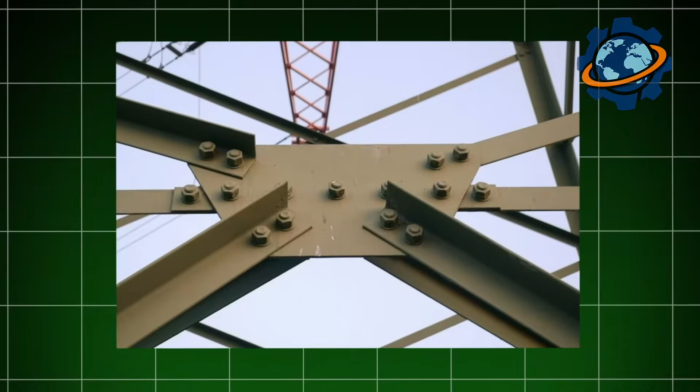And on the construction site, the sections are joined again, this time by welding or using special bolted joints. The result is a continuous rail line that stretches for kilometers without a single click. The same silent glide we've come to expect on high-speed trains.

But first, after rolling and welding, the rails are still alive. There's stress left inside the metal, and the grain structure needs to be stabilized. This is where heat treatment comes in, giving the rail its strength, wear resistance, and durability. And it looks almost like a metallurgical spa session. The rail is rapidly heated to high temperatures, around 1800 degrees Fahrenheit, 1000 Celsius.

This is done in furnaces, tens of meters long, where the temperature is controlled to the degree. At this heat, the steel's crystal lattice shifts into a new state, austenite. But the main event starts after that.

The rail is instantly cooled. Jets of high-pressure water are aimed along the head and web, the very parts the wheel rolls on. The temperature drops in a flash, and a new structure forms in the metal, martensite, an extremely hard, wear-resistant phase.

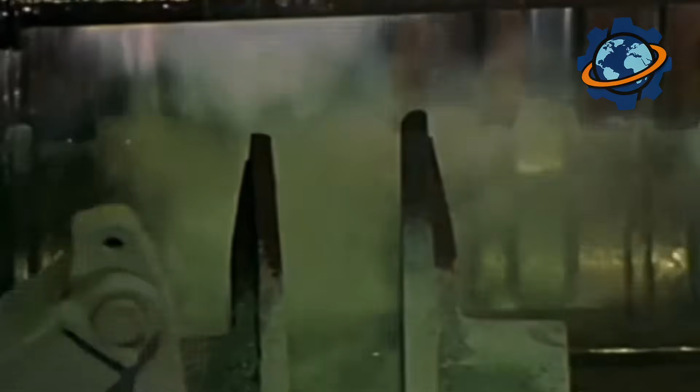But to avoid brittleness, the rail is slowly heated and cooled one more time. This balances the structure, relieves any extra internal stress, and ensures the rail can handle frost, heat, and thousands of trains a day. In the end, the metal holds its shape and withstands pressures of tens of tons per square inch without deforming.

Before a rail hits the road, it goes through a whole series of tough tests, like it's trying to join an army of high-speed transport. In special labs, it's checked for strength, hardness, geometry, and internal defects.

First up, ultrasonic testing. High-frequency waves are sent into the rail. If there's a microcrack or void inside, the signal bounces back and flags the problem. Then, hardness measurements along its entire length to make sure the heat treatment was uniform.

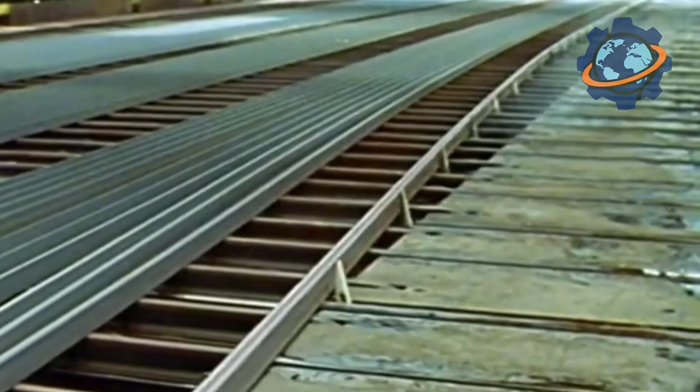At the same time, its straightness and profile are checked. Laser sensors scan every inch, detecting even tiny warps that could cause vibration or wear. And finally, bend and impact tests. A piece of the rail is loaded with pressure dozens of times greater than the weight of a train to make sure it can handle any challenge on the route.

When the rail has successfully passed all the tests, it's time for its most important journey, to the installation site. But how do you transport giant metal strips over 90 meters long? Regular trucks can't handle it.

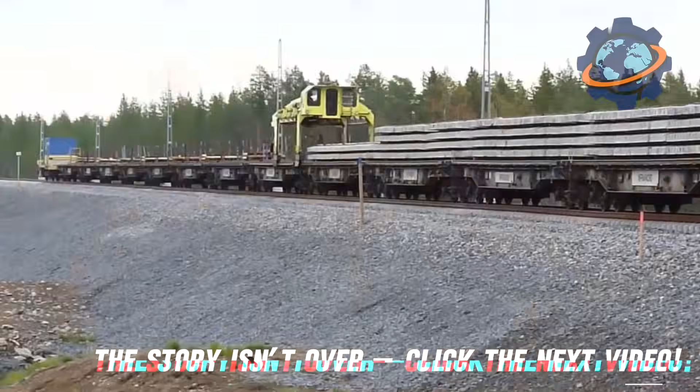Here, they use special railway platforms with curved supports that reduce stress and prevent the rail from sagging or vibrating during transit. Sometimes, rails are transported already welded into even longer sections, from 400 to 600 meters.

Before installation, the rails are heated or cooled depending on the ambient temperature. This is to compensate for the thermal expansion and contraction of the metal. Otherwise, it would buckle in the heat or gaps would form in the cold. In practice, each rail is laid with these physical changes in mind, usually at a stress-free temperature point.

Every year, over 30 million tons of bamboo are harvested worldwide. But did you know that this seemingly ordinary grass can transform into steel, silk, and even concrete? It grows faster than any tree, absorbs more carbon dioxide than a forest, and doesn't require replanting. But the most interesting part is what's hidden inside its fibers. In this video, we'll show you how giant green stalks travel from plantations to ultra-durable flooring and delicate fabric. And if you watch until the end, you'll learn one shocking fact that will change your perception of the future of ecology.

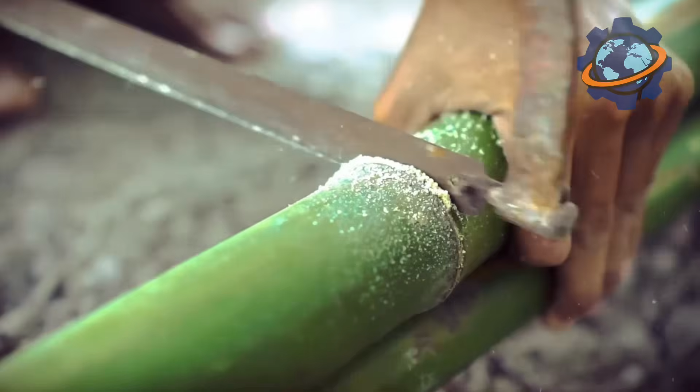It all begins on vast bamboo plantations, covering millions of acres around the world. These are not chaotic thickets, but carefully managed farms. Unlike forests, bamboo does not require replanting. When one stalk, or culm, is cut, its extensive root system, called a rhizome, immediately sends up new shoots. This makes it one of the most sustainable resources on the planet. One plantation can yield harvests for decades without harming the soil. Moreover, a bamboo forest absorbs 35% more carbon dioxide and produces 35% more oxygen than an equivalent area of trees.

Harvesters, armed with simple machetes or handsaws, selectively cut only mature stalks, whose age can be easily determined by color and texture. Young shoots are left to grow further, ensuring the continuity of the cycle.

One such mature stalk can reach 60 feet in height and weigh over 100 pounds, making its transportation from the plantation to the primary processing plant a complex logistical task. When these green towers arrive for processing, their radical transformation begins.

First, the long stalks are cut into manageable sections. Then, they are fed into a special machine that, with a deafening crack, splits the round sections into long strips.

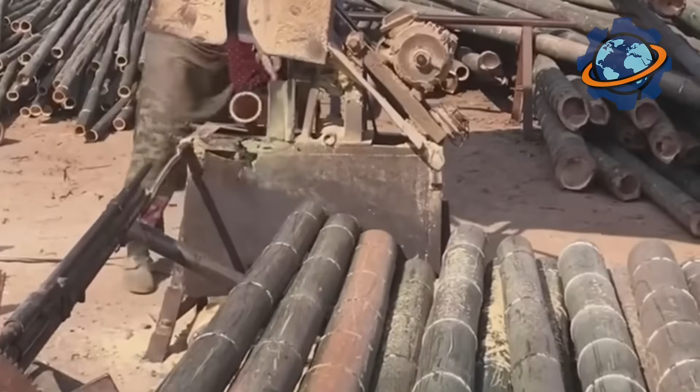The next step is to remove the outer greenskin and inner nodes, leaving clean, light bamboo planks. But inside these planks still lurks an enemy of durability: starch and sugar, which are a favorite food for insects and mold. To get rid of them, the planks are submerged in huge vats of boiling water or a hydrogen peroxide solution for several hours. This hot bath not only sterilizes the bamboo, but also washes out all the nutrients.

After this, the planks are sent for drying. Some producers dry them in the open air, but for industrial scales, they are loaded into giant kiln dryers, where they spend several days until their moisture level drops from 50% to an ideal 8 or 10%. This stage is critically important, as any residual moisture can lead to warping and cracking of the finished product.

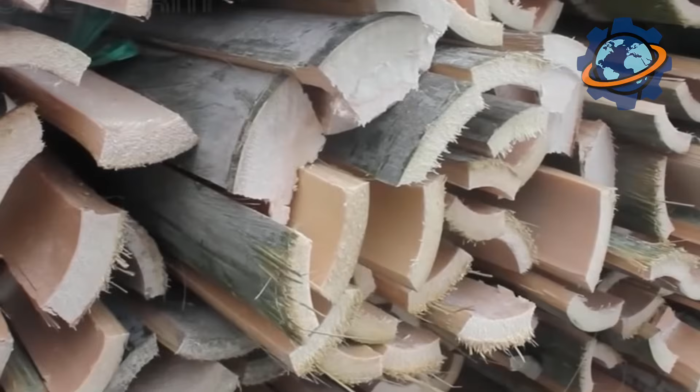But the journey from a 60-foot pole to a smooth floorboard requires even more impressive engineering. The dried planks pass through milling machines that give them a perfectly rectangular shape. Then begins a process similar to making industrial lasagna. To create horizontal flooring, the planks are laid in a single layer and glued under pressure. For vertical flooring, the planks are placed on their edge and pressed from the side, creating a denser pattern.

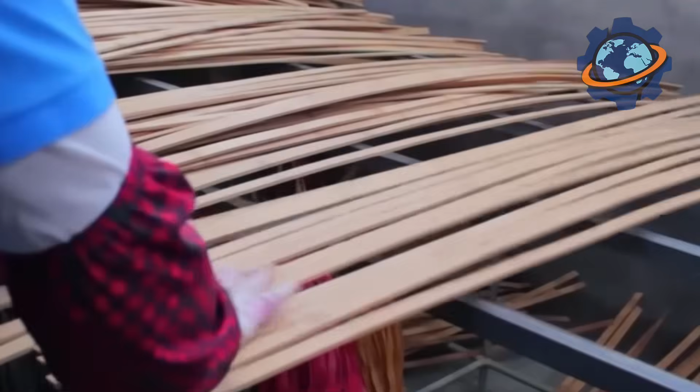But the real marvel is the strand woven technology. Here, the bamboo planks are not just glued together, but completely shredded into long fibers, mixed with an environmentally friendly resin, and loaded into huge steel presses. Under infernal pressure, reaching 3,000 pounds per square inch, and high temperature, this mass transforms into an extremely dense, monolithic block. The hardness of such flooring on the Janka scale can exceed 5,000 units, making it more than 3 times harder than oak, and more resistant to scratches and dents than most traditional wood species.

However, hardness is only one of bamboo's facets. Its other superpower is the ability to transform into something incredibly soft and silky. The process of creating bamboo fabric is a true industrial alchemy. The most common method, known as the viscose process, begins with grinding the bamboo raw material into a cellulose pulp.

This pulp is then submerged in a sodium hydroxide solution and then carbon disulfide, which turns it into a thick, viscous liquid. This liquid, resembling honey, is forced under pressure through the finest holes of a metal plate called a spinneret. Imagine a microscopic shower.

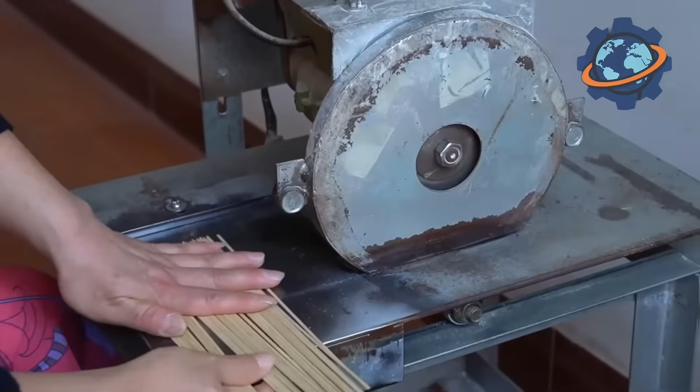Emerging from the holes, the thin streams enter a bath of sulfuric acid, where they instantly solidify, turning into endlessly long fibers. These fibers are then washed, bleached, dried, and twisted into yarn, from which fabric is woven. Despite the complex chemical process, the final product is biodegradable and has unique properties. It is extremely soft, hypoallergenic, has natural antibacterial properties, and breathes wonderfully, making it ideal for clothing and bedding.

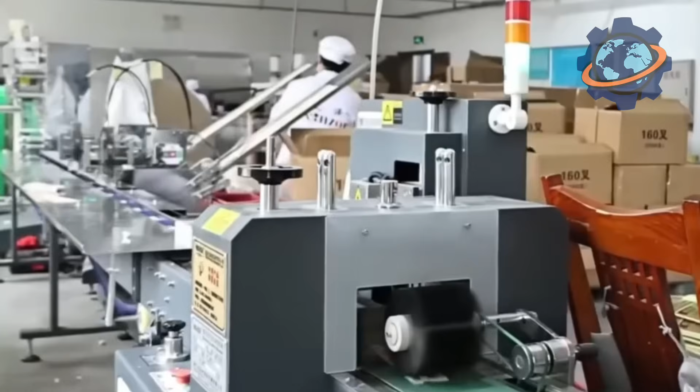The global bamboo market is colossal and is projected to exceed $100 billion in the coming years. Annually, over 30 million tons of bamboo are harvested worldwide, and this figure is only growing. From kitchen cutting boards and toothbrushes to construction scaffolding capable of supporting the weight of concrete, and elements in premium class cars, this giant grass demonstrates its versatility.

It is a testament to how nature, multiplied by human ingenuity, can offer sustainable, strong, and beautiful solutions for countless tasks, turning a fast-growing straw into the gold of the modern world.

Bamboo grows both in the wild and on specially created plantations. Its natural habitat mainly covers tropical and subtropical regions of Asia, where it is an integral part of local ecosystems. At the same time, thanks to its unique properties and wide range of applications, bamboo is actively cultivated on plantations around the world.

It is cultivated for the production of building materials, textiles, paper, interior items, and as a source of biomass. In the wild, there are over 1,000 species of bamboo. It is a perennial evergreen plant belonging to the grass family.

Bamboo is known for its extremely fast growth. Some species can grow several tens of centimeters per day. Bamboo blooms very rarely, and after flowering and fruiting, the plant usually dies.

Growing bamboo requires certain knowledge and care, including proper planting, regular watering, and choosing the right variety for specific climatic conditions. There are even ornamental types of bamboo that are grown in gardens and at home.